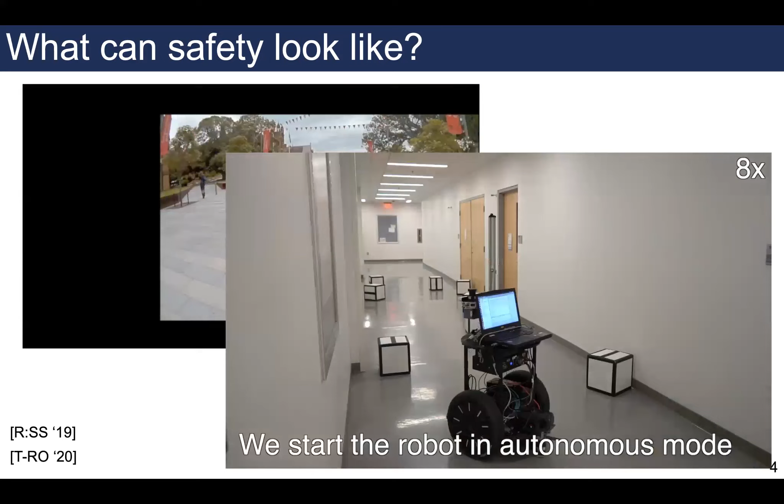And I apologize, the video froze. Well, it looks like there's a bit of lag on my end.

I don't know if you see it on your end, but whatever the case, the robot is able to drive around, avoid some boxes, and adapt to this changing environment in real time. The neat part is we can make a formal guarantee that this will happen before we actually run the robot. That makes it much more reasonable to test. Here you can see I am an obstacle, right? And I have no worries about being in front of the robot because I know it will, in this case, safely stop. Unless I hit it, it will be okay.

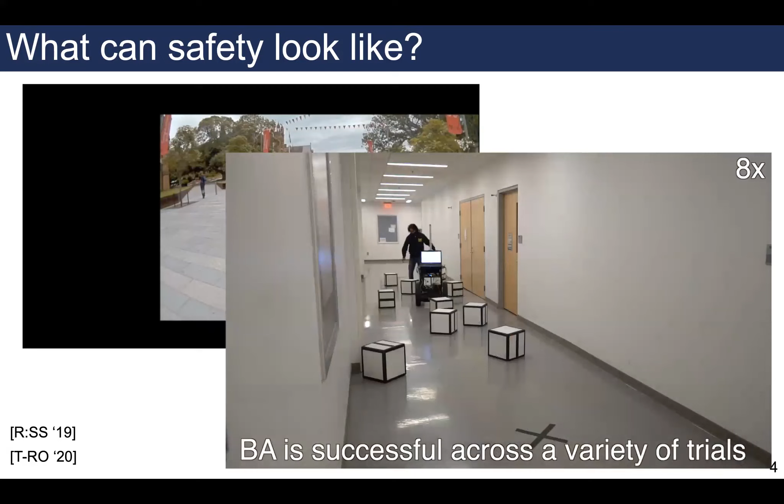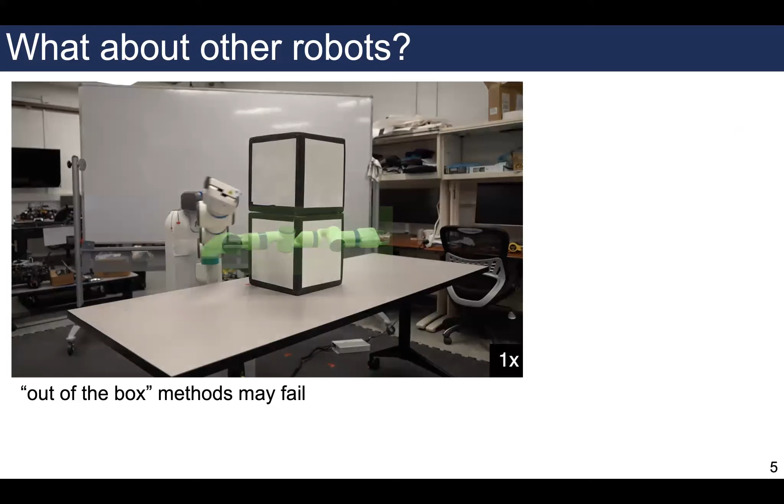This is important because this philosophy can carry over to a variety of robots. With out-of-the-box methods, and this is a bit of a contrived example, we were surprised to see that a generic solver, if you start in a singular configuration, may just converge to a really, really bad solution. In our case, we were able to solve that singular configuration problem as well, but I wanted to show this little video of a dynamic obstacle and making a safe decision. Here I accelerate the end of the video just because the robot is moving in the plane of the camera, so it's a little bit hard to see it.

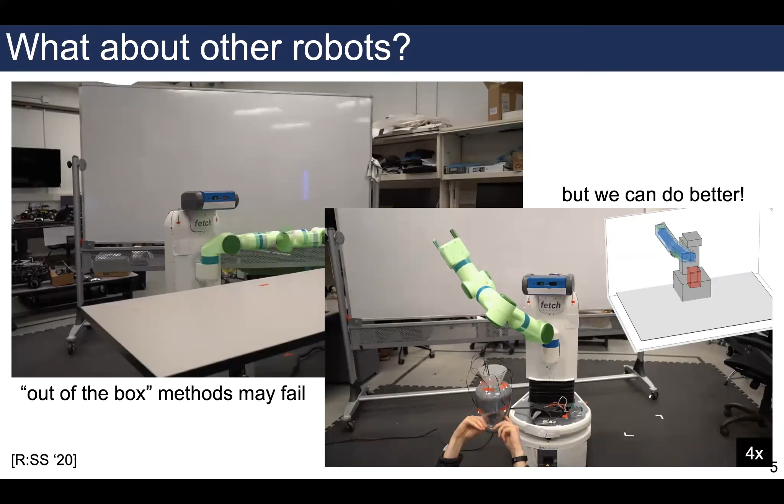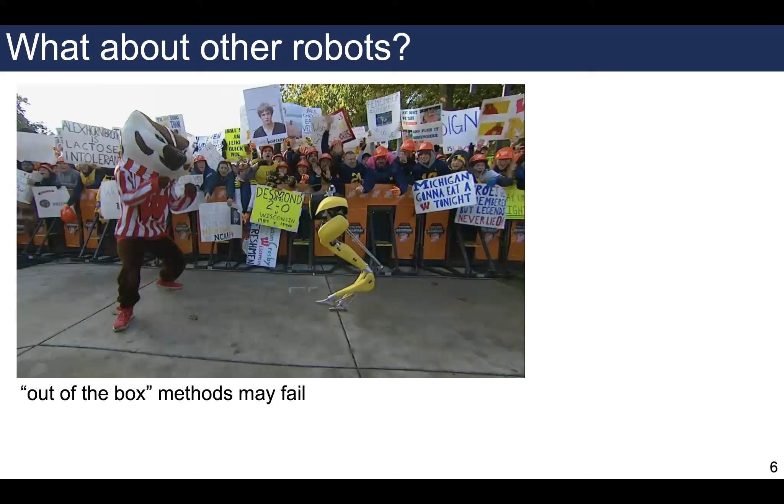But the point is, we can do better if we're very careful about pre-defining safety and getting it to work on the real robot. This also isn't always necessarily just about saving the world. Sometimes it's just embarrassing on public television when your robot falls over. I feel a little bad that this poor video of Cassie at Michigan has really gotten the runaround, but at least we won that football game.

The methods I talk about today are already being put or extended onto legged robots such as this Digit. So here Digit is autonomously deciding to move around these obstacles, and there's a guarantee that it won't fall over as well. The neat part is, by being clever, we can start to create these methods that let us put robots out in the real world. So the vision here is formalizing safety to enable wide deployment.

And obviously, you have to ask, how do you define safety? And then defining it on the whiteboard is one thing, but actually getting it to work on the robot is a whole separate problem. In this talk, I'll discuss reachability analysis methods and geometric methods that we've used in the past to answer these questions.

Okay, so first off, how do we define safety? I like to think of things in terms of the full autonomy stack. As a running example, I'll use this autonomous car. So our hardware may be the car itself. And let's suppose that we have to get to this global goal, the green star down at the end of the road. The first challenge is to sense the things around us correctly, and sensors are inherently limited.

So safety in the sensing world means correctly or conservatively detecting and predicting the motion of others. I won't focus too much on that in this talk; that's something for ongoing and future work. Instead, I'll focus on this planning and control problem. On the planning side, we usually create intermediate goals such as waypoints, and then use a simplified planning model, as I'll call it. I'll denote that with a script F. This planning model is usually a simplified description of the vehicle or robot dynamics.

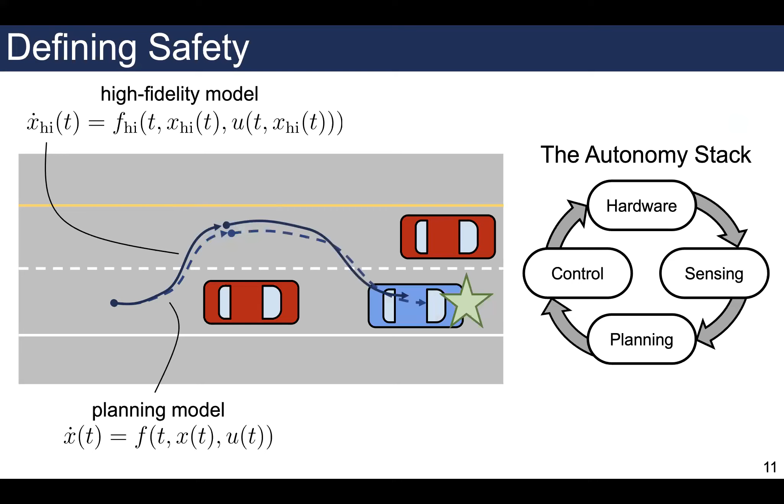And then if we were to track those plans, because it's simplified, we don't do a perfect job. So we can try and incorporate a much more accurate physics description if we were to simulate this robot, and I'll call that the high fidelity model. If we can compensate for the mismatch between these models and still execute plans that are not overly conservative, we can safely get to global goals. I'll call this mismatch tracking error.

And the idea is that safety throughout this talk will just mean collision avoidance. We can get to more sophisticated notions of safety going forward, but collision avoidance is one of the really hard ones. It's non-convex, it's non-linear, it shows up in workspace. So it's a hard problem to solve. So in this talk, I'll focus on safe, real-time, and even optimal planning and control. This is really the focus of my past work, all this planning and control stuff with the focus of getting it working on real hardware.

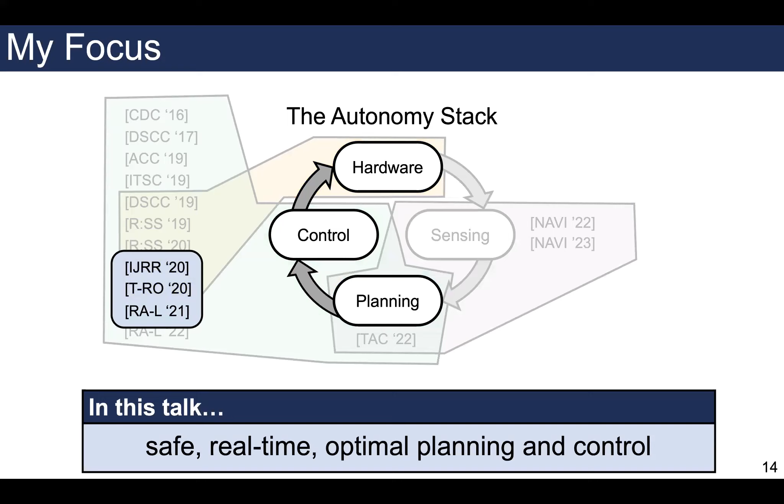And more recently, we've managed to think about sensing with some guarantees, but it turns out it's very easy to get very conservative results where you think your robot could be anywhere. So this is a key challenge for future work. Now, I can't talk about everything, so I'll focus on these three key ideas. In particular, this broad idea of reachability-based trajectory design. So I'll introduce where it came from and how we started out in this area.

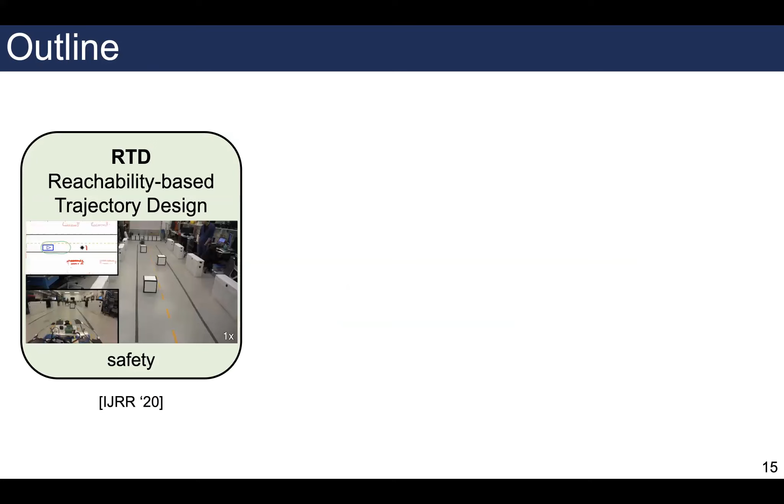And then how to exploit the safety layer. I'll exploit it in two different ways. One is on the optimization side, designing a careful optimization procedure to enable really fast and safe motion planning. And then throwing learning into the loop. So how do we use the safety layer in collaboration with an RL agent to really outperform any human-tuned way of doing this motion planning?

Okay, so feel free to interrupt during the talk with questions, and I'll go ahead and get into the first part. I'd also like to say this is all collaborative work. I tend to not like working on my own in an office somewhere. So this is the most fun part about research for me, really meeting cool, smart new people and getting to work with them.

Let's go to the safe planning problem, and we'll focus on just this left part of the autonomy stack, so planning and control really. We usually want to minimize some arbitrary cost function while picking a control and state signal subject to our dynamics and being outside of obstacles. Enforcing this constraint of being outside of obstacles is non-convex, and we have to enforce both of these constraints at infinitely many points in time. So as easy as it is to write down this problem, it's very hard to implement numerically.

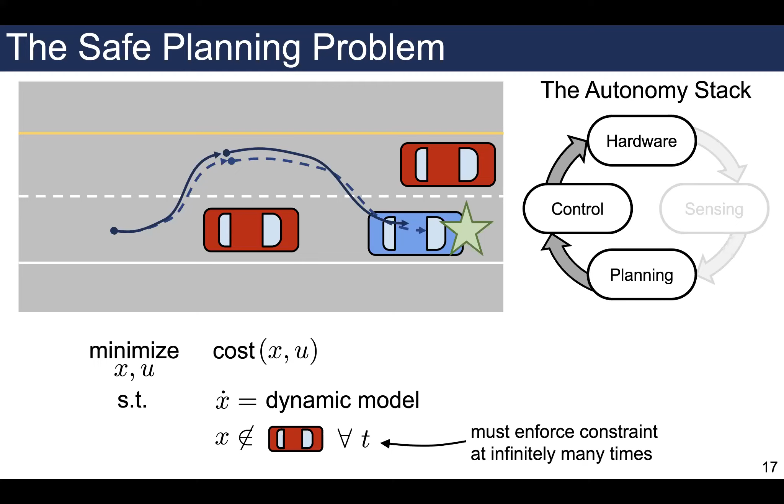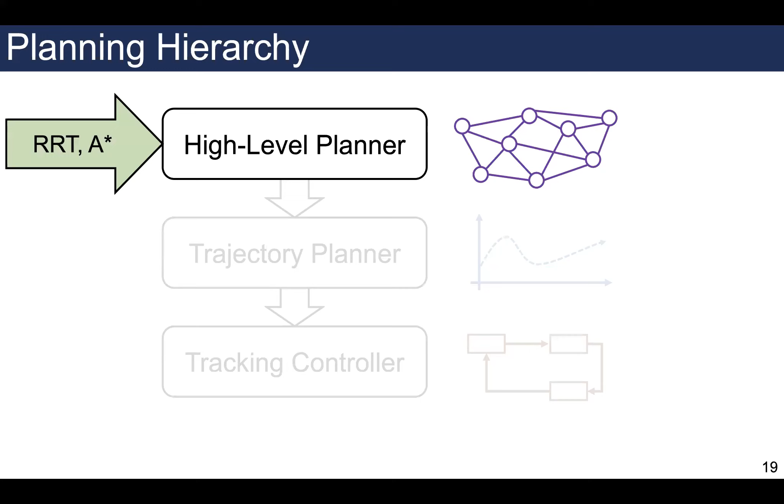Often one way to do this is to think about the planning hierarchy. So at a high level, you can create waypoints, pass these to a trajectory planner or mid-level that can plan to intermediate local goals. And then at the lowest level, your tracking controller will try and track those trajectories accurately. And as an example of the high-level planner, many of you are familiar with RRT or A*. Often in the autonomous driving case, we can think about really leveraging the physics of the vehicle.

So one example is this state lattice idea, where a point in this parameter space on the left corresponds to motion plans or path plans in the space on the right. I'll use this big K to denote parameters throughout the talk, and then big X to denote a state or workspace.

If we have an obstacle in this case at the high level plan, we can use it to eliminate plans that are unsafe. But to compensate for the uncertainty in our motion or the fact that our vehicle occupies volume, we have to dilate these obstacles by some amount. And so there's this conservativeness trade-off of how much to dilate to be safer versus making it so that we have fewer options that we can pick from.

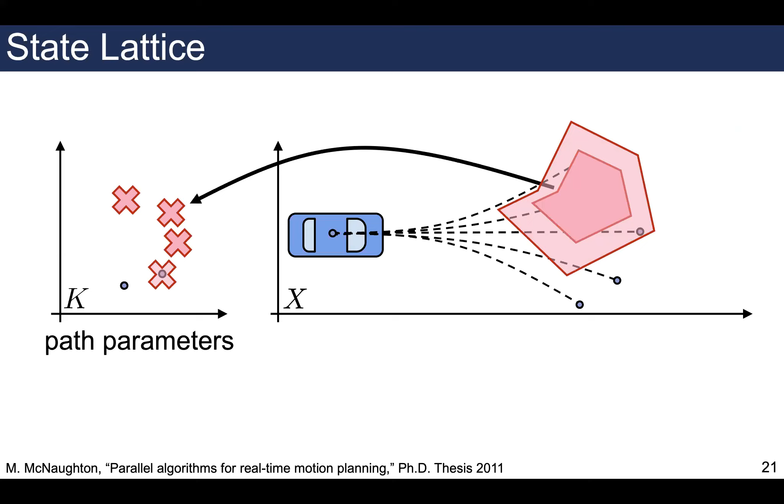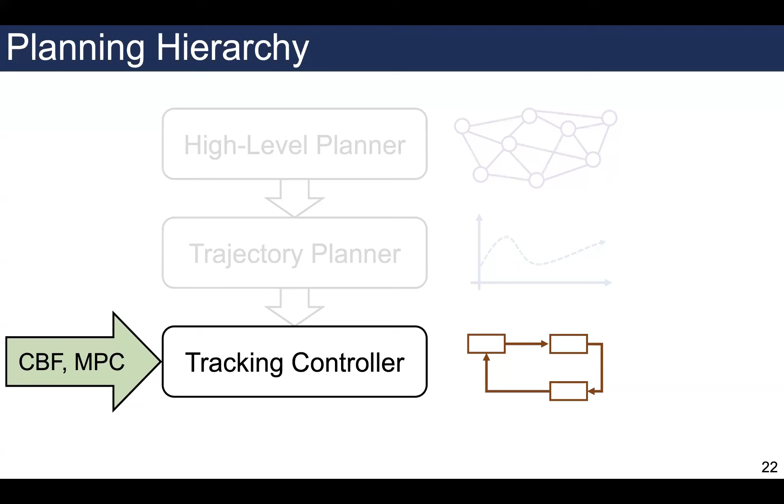We can also think about enforcing safety at the lowest level. So you may be familiar with control barrier functions or model predictive controllers, and I'll give you a cartoon overview of these again. I'll also point out, I like cartoons a lot. Please understand, anytime you see a cartoon, there's math underlying it, but I want to convey the high level idea. And then I'm happy to talk about the math, either by answering questions or offline.

So one way to think about control barrier functions, and certainly you shouldn't take this as gospel truth, but this is one way to think about it. Imagine that we have a nominal control input. So in this case, our vehicle just will go straight. But in the presence of an obstacle, we want to make sure that we stay outside of it. So I want to certify that this green set is control invariant, or I can stay within it.

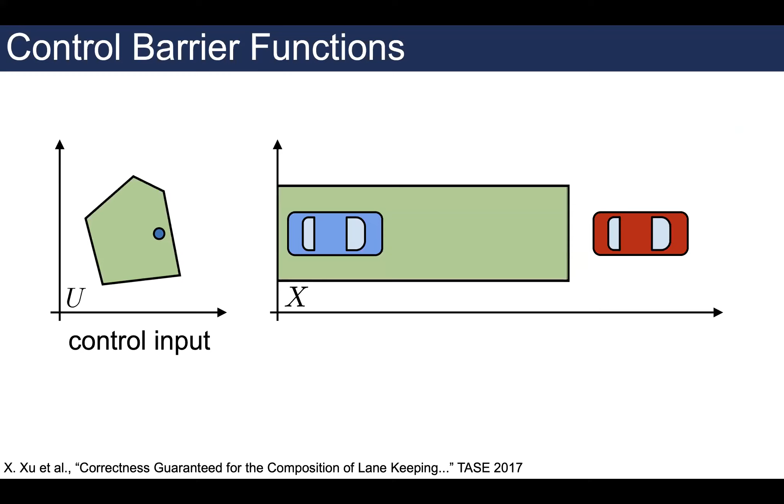If we can find a control barrier function, often this turns into a polytope of constraints on our control input that let us adjust unsafe controls to keep us within this safe set at all times. If we want that safe set to be much larger, it can often restrict our controls much more. So there's a bit of a safety versus performance trade-off, even though we can have a very strong safety guarantee.

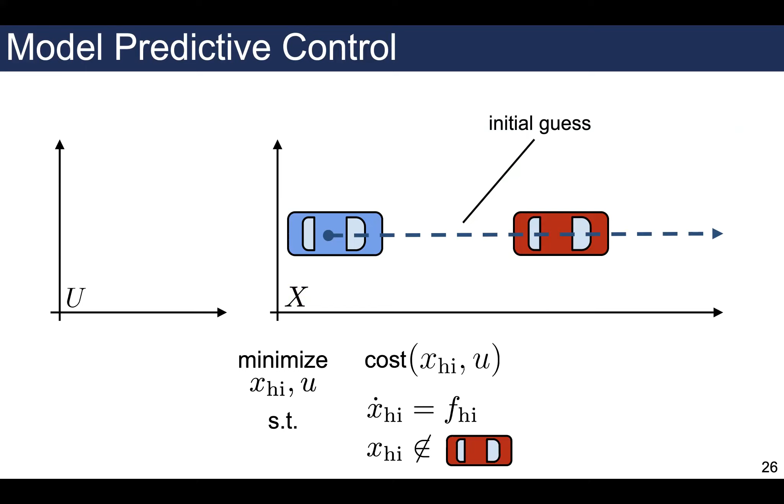One way to start to get away from this trade-off is through carefully designing MPC. So if I had an initial guess, I want to solve this exact problem we wrote down earlier, but while really considering the high fidelity dynamics, an accurate dynamical model of my robot. A solution may look like some trajectory in control space and a corresponding trajectory of the high fidelity model of the vehicle. But of course, directly solving this nonlinear, non-convex program at runtime is very, very challenging.

Instead, we can try to convexify our constraints. So create a tube of convex shapes to stay within. And typically we have to discretize in time. So we can't directly represent or put constraints on the continuous time trajectory very easily. And computing these convex tubes is its own challenge.

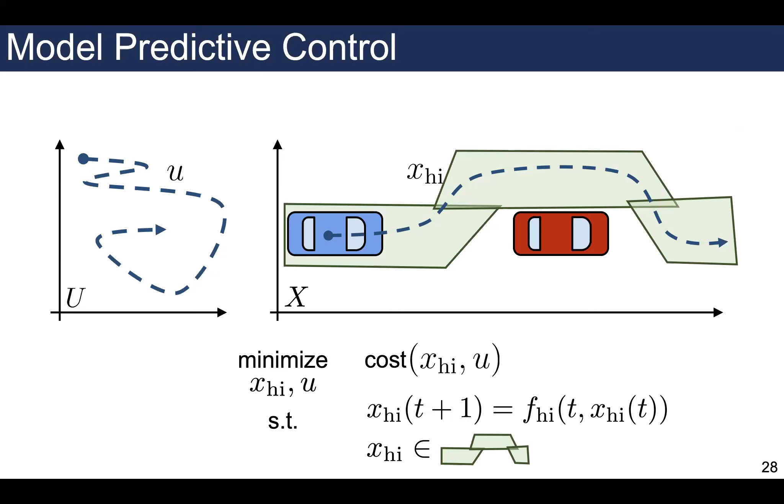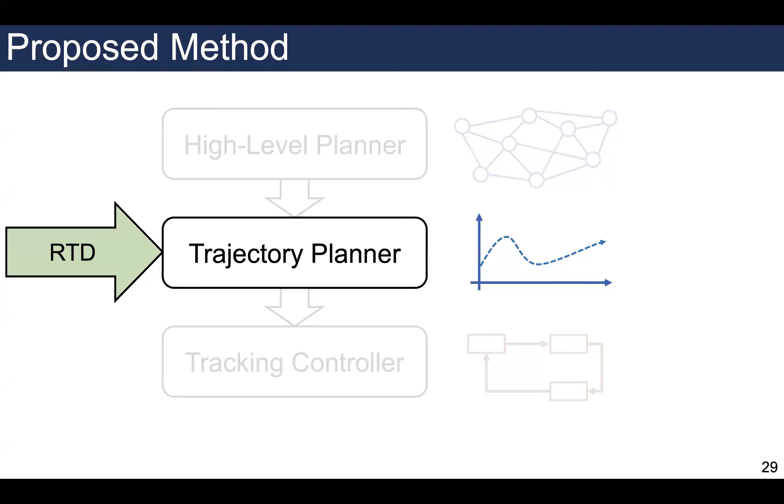I'll present RTD that thinks about safety at this middle level. And so we get costs from the high level planner, and we know something about the performance of our low level controller, and we enforce safety in the middle. In particular, we want to consider tracking error.

So we know that we're planning with some incorrect model of our robot. We want to incorporate continuous time and space collision avoidance. And we want to represent our obstacles in a way that enables really fast trajectory planning. And in particular, it's cute, but these are the contributions that we'll call RTD.

Okay, so how do we start? We begin by computing what I'll call the forward reachable set offline. And you can think of this trajectory parameter space, so similar to the state lattice, but now we're parameterizing trajectories, not paths. And each point in that space corresponds to some short motion plan of the robot. I'll give you an example of what these look like shortly.

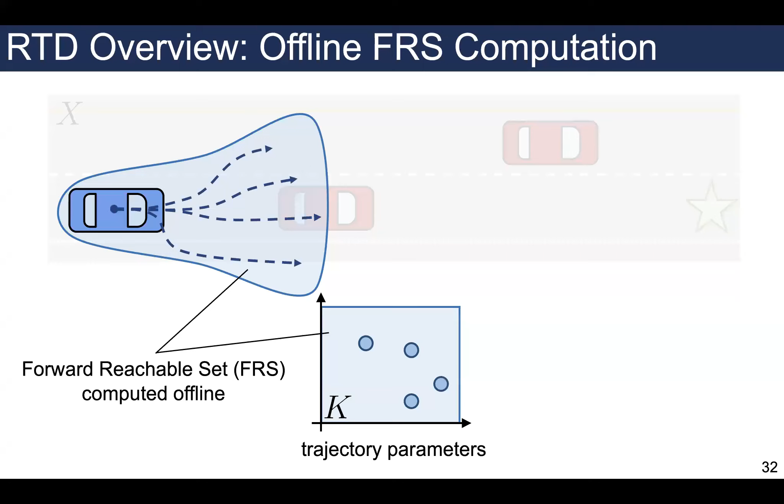If I can compute the continuum, this reachable set in state space corresponding to all possible trajectories, I can do this offline while incorporating tracking error or this model uncertainty into my computation. Given that object computed offline, we can use it online as follows. We can intersect it with unsafe sets and then project that intersection into our space of parameters.

And then given something like a cost function, so reaching a waypoint that can also be projected into the parameter space, we can basically treat the obstacles that are in workspace or state space as constraints in our planning space, and know that the corresponding tube of motion around our nominal trajectory is actually certified to be collision-free. This is despite the fact that our vehicle may not perfectly track these trajectories.

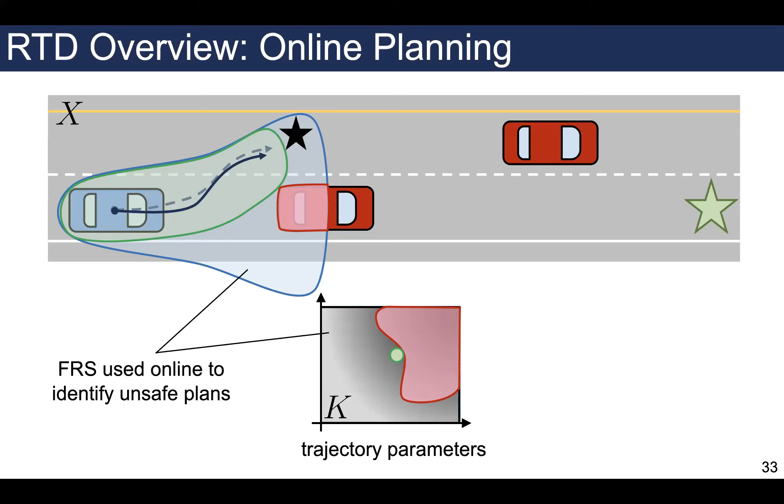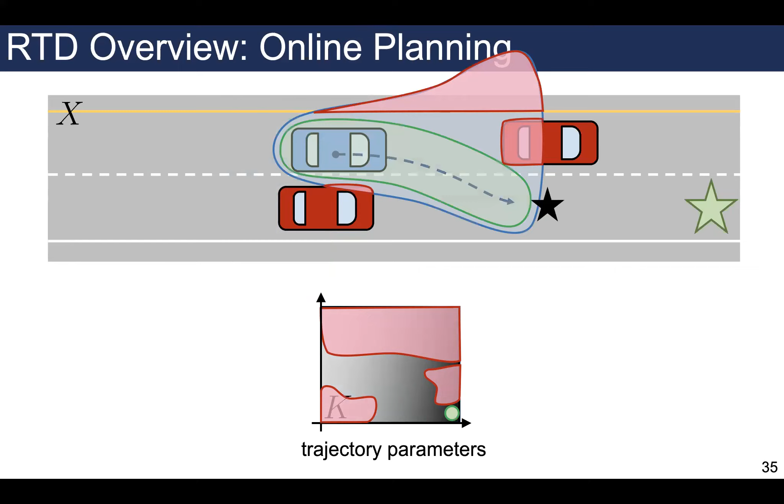Every t-plan seconds, we can rinse and repeat this procedure. So what I mean is that we're replanning over and over and over. What we'll do is we'll identify constraints, create a cost function, such as reaching a waypoint, optimize over that cost function subject to the constraints, and know that the corresponding tube is collision-free, despite uncertainty.

Shreyas, go ahead. To stop you, there was a raised hand by Chui Zhang. Yeah, go for it. I guess this was a question. Yes, can you hear me? Yep. Yes. Yeah, go ahead.

So just wonder, what's the axis of the parameter space? Like, what would be the unit, or just in general, what does the axis represent? That's on the very next slide. Good question.

A parameterization that we found really useful for vehicles is a speed and yaw rate that are profiled through time that brake after the time t plan. So if you're replanning every t plan seconds, then your speed and yaw rate, or your nominal speed and yaw rate, are changing. And you may have noticed that we're solving a nonlinear non-convex program anyways, and I complained about that, so we'll solve that later in the talk.

If I can't solve that problem fast enough at runtime, then my previous trajectory parameterization brakes to a stop. This is the notion of a fail-safe maneuver as well. So this has been explored a lot also by researchers in Munich. So the idea is, we can parameterize something that does something meaningful, like go at a certain speed and turn at a certain rate, and parameterize the braking maneuver all in one small set of numbers. And that reduces the size of the space that we're searching over, this space K on the left.

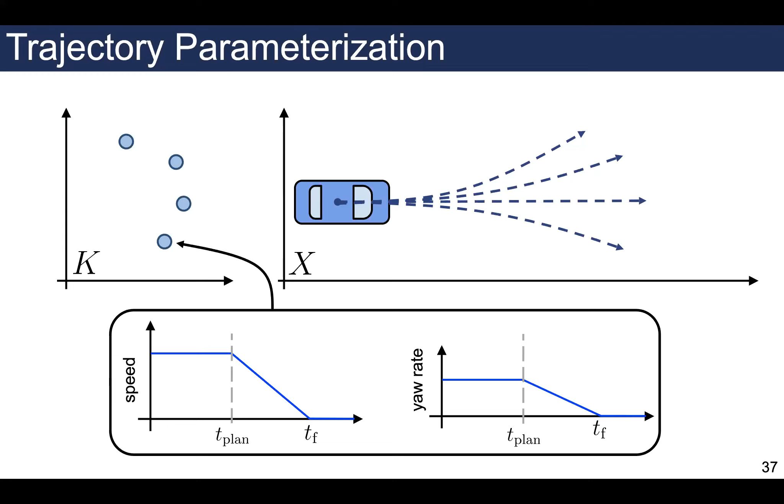So I hope that answers your question, Kong. Also nice to see you. Thank you for coming to the talk. Of course, thank you. Okay, so let's take this parameterization and run with it.

Now what we want to compute is, given our planning model, the tube around our nominal trajectories or our planned trajectories that compensate for the uncertainty in our system. And we'll do this by introducing what I'll call a tracking error model. So G here is a function that captures the tracking error, and then D is a function that sweeps, so it's just a function of time that maps to plus or minus 1,

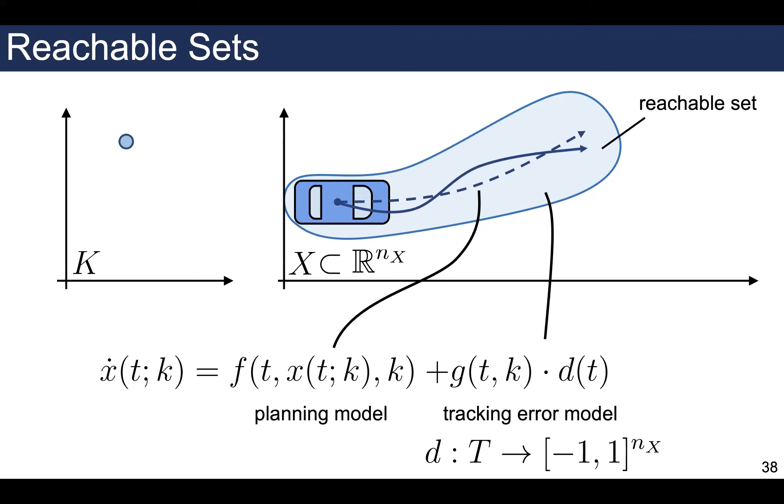so it sort of sweeps out the volume around this trajectory. And to give you a more visual understanding of what this looks like, you can imagine that G overbounds sampled tracking error trajectories through time, and then D lets us sweep out the volume.

Given a polynomial representation of the planning and tracking error models, we can then compute this forward reachable set object. In particular, one way to do this is to use a sums of squares program to find a polynomial W, such that any point in the FRS, so any point that's in the blue set, evaluates to greater than or equal to 1 on this function W.

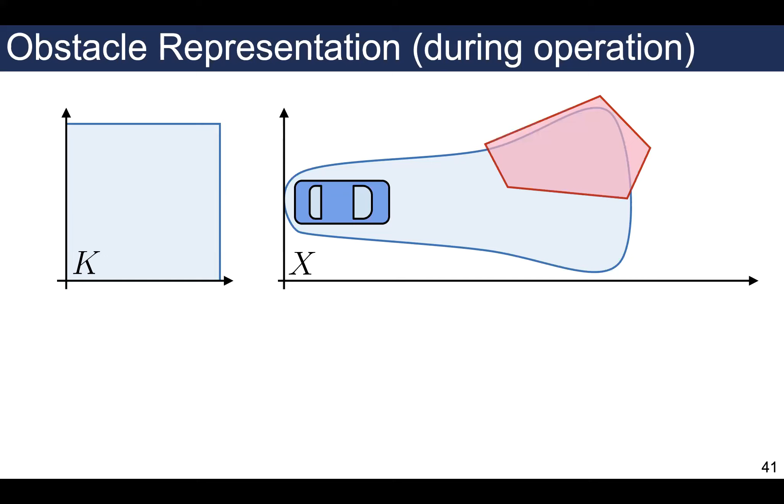Now you can imagine that this exactly will show up as a constraint for online optimization. We care about W evaluating to less than 1 for our choice of trajectory. So this is how we use the forward reachable set at runtime, at least in the vehicle case. Given an obstacle, we want to project it into the planning space on the left, so KU for unsafe.

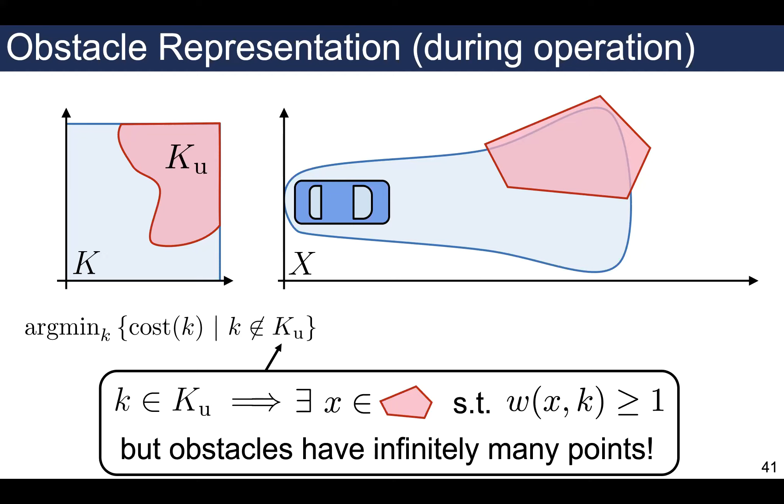The idea is to solve this problem of finding some K that is outside of the unsafe set, subject to an arbitrary cost on those parameters. And the issue is checking if a point is unsafe means checking if there exists some point in that obstacle that intersects with the unsafe set. So we have to evaluate our polynomial W on every single point of the obstacle, and this is numerically challenging.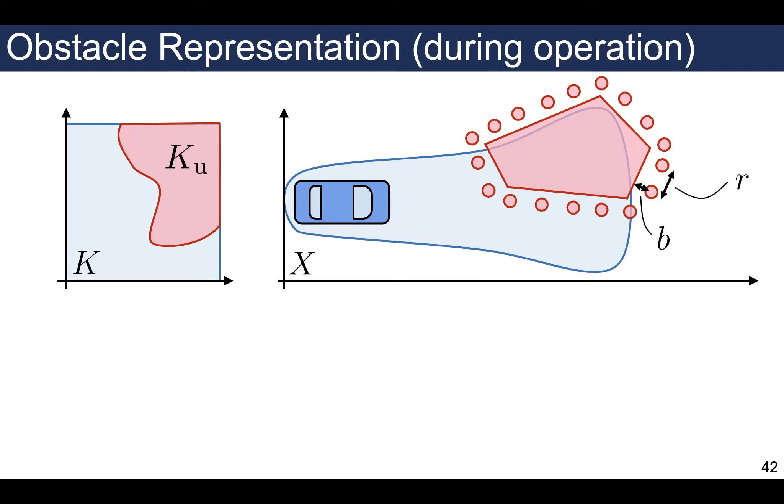Instead, what we can do is create a discretization of our obstacle, so a finite number of discrete points parameterized by a spacing R and a buffer B, with the physical intuition that our vehicle, or robot more generally, cannot squeeze between these points. The critical thing is that these values exist and they're bounded for any compact body, meaning our robot, not the obstacles. And as long as the obstacles are polytopes, then we can compute this pretty easily.

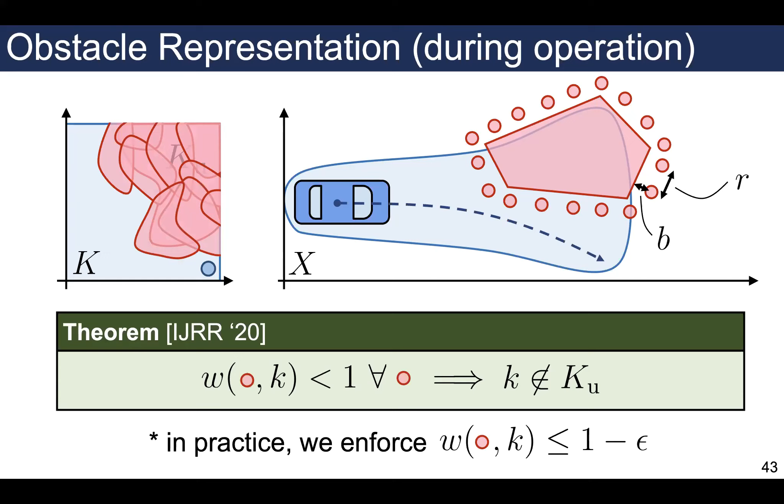The cool thing is now we can evaluate that W polynomial on a finite number of points to check whether we're safe or unsafe. And you can imagine this as taking each of the discrete points that you see on the right and mapping them to a corresponding set on the left. And that overbounds, or covers, our true unsafe set, such that if we optimize outside of it, we're good to go.

Now, we can also do this in the dynamic obstacle case. In this case, we have to discretize with some delta T, as well as the point spacing R and buffer distance B that you saw earlier. And just to hint at this idea, I'm interested in the longer term in the legal aspects of autonomous driving or widespread robotics. In this particular paper, we took the idea that safety means we're not at fault in a collision, and we turned that into collision avoidance constraints and a constraint on our braking behavior.

The cool thing is the hard constraint I've seen is almost always this non-convex obstacle avoidance constraint, but you can start to add other constraints as well for online planning that let you start to respect or obey the law, and the overall framework doesn't change very much, so it can compensate for these more general notions of safety.

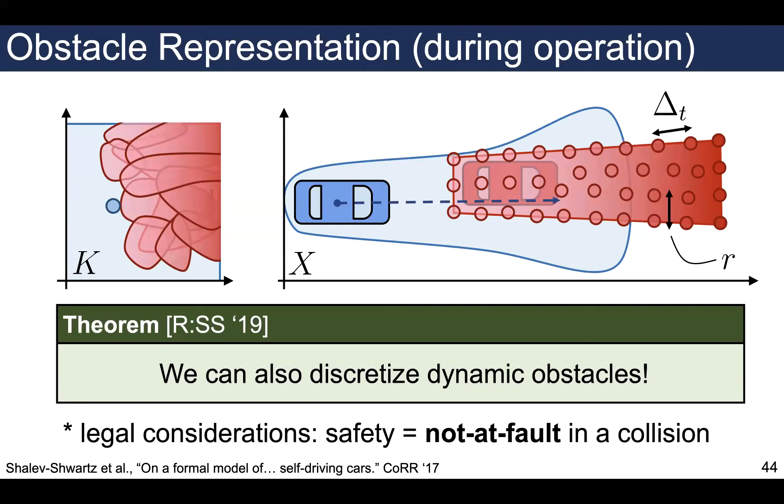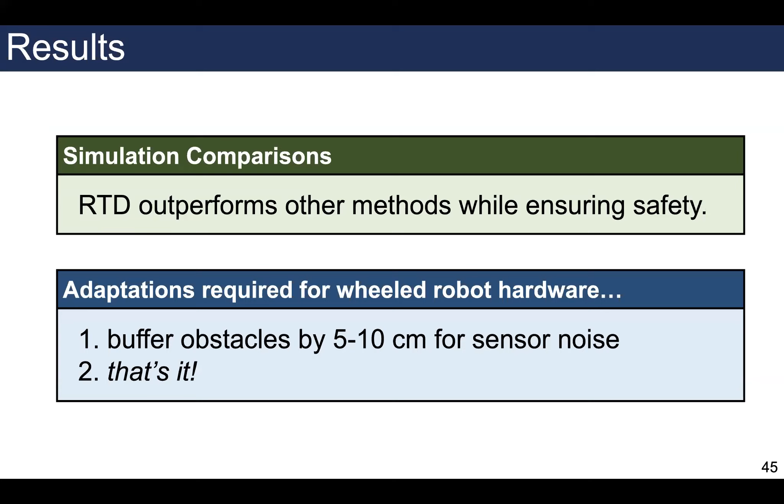Okay, so what does it actually look like? We found that it outperforms a variety of other methods while ensuring safety. I will point out a caveat here. It's very hard to set up a fair comparison. I mean, this is generally true. And I think that now we have the ARCH challenge for hybrid systems or reachability analysis, so there are efforts underway to create fair comparisons across a variety of methods. And so with that caveat in place, I'll still present these comparisons, but know that just setting up the comparison fairly is still a challenge in this field.

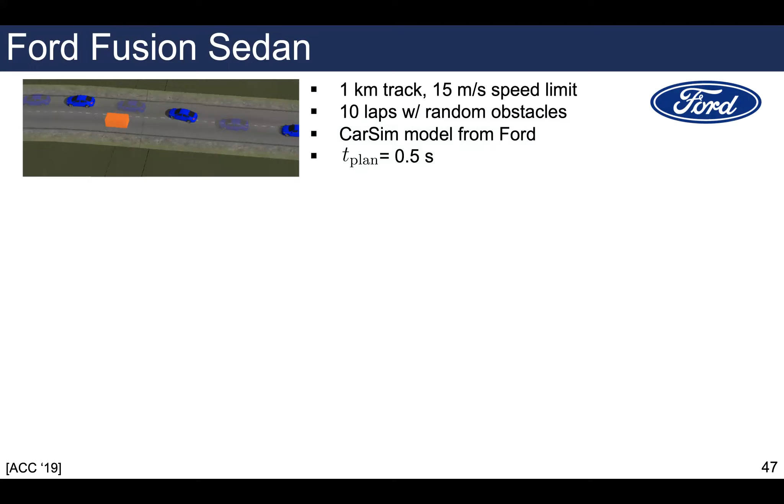And certainly you can see some conservativeness. Our reachable set bleeds out into the shoulder a little bit. So reducing that conservativeness is a big challenge going forward. But what we did is we tested it on this 1 kilometer long track to do 10 laps with random obstacles and replan every half a second. I will point out that Ford has taken this method and now they're replanning at 50 hertz, not at 2 hertz. So that was the engineering problem, not the research problem.

And to complete these 10 laps, we found that RTD was able to do it 100% of the time while planning in real time. We also compared against an RRT based on one of the DARPA challenge RRTs, and then against GPOPS-II, a model predictive control solver that had access to a very, very accurate dynamics model. I tuned this RRT and there's one crash where it couldn't brake in time. I'll point out, you can absolutely use a much more specific version of high-level planning or path planning to solve the same problem.

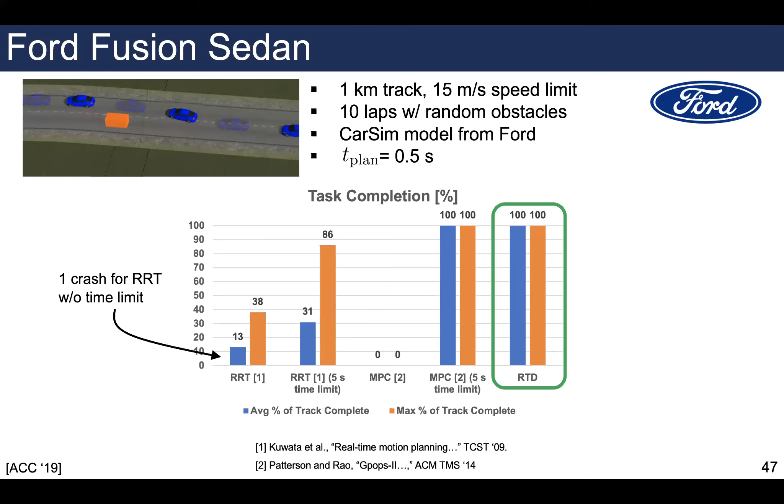But the point of this was to say RRT and MPC in this comparison had a safety versus performance trade-off. And we were starting to see a decoupling of that. We were able to get performance while also getting safety and planning in real time. And this is the beginning of this work that made me feel really excited that we're onto a good way to not just write down theoretically what safety means, but also to put it on the actual computer, on the hardware.

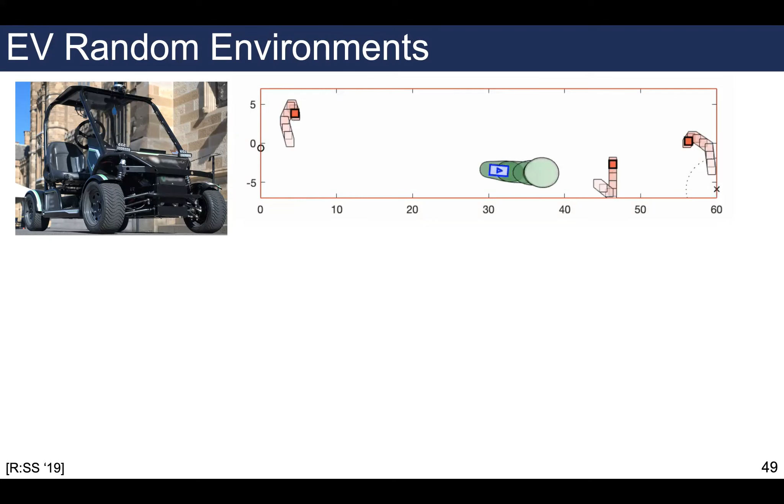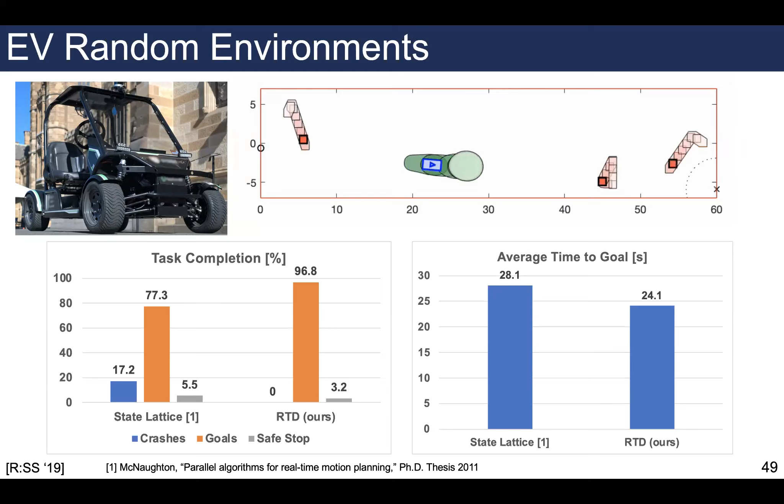What we found is that it took us less time to reach the goal in these random environments. So by driving a little bit more carefully, but by making that safety guarantee, we were able to improve the rate of a mobile robot moving through a dynamic world. We also tried some more structured environments. So here's unprotected left turns where the cars and pedestrians are simulated. They don't care about each other. They're just doing what they're going to do, and we assume some prediction of them.

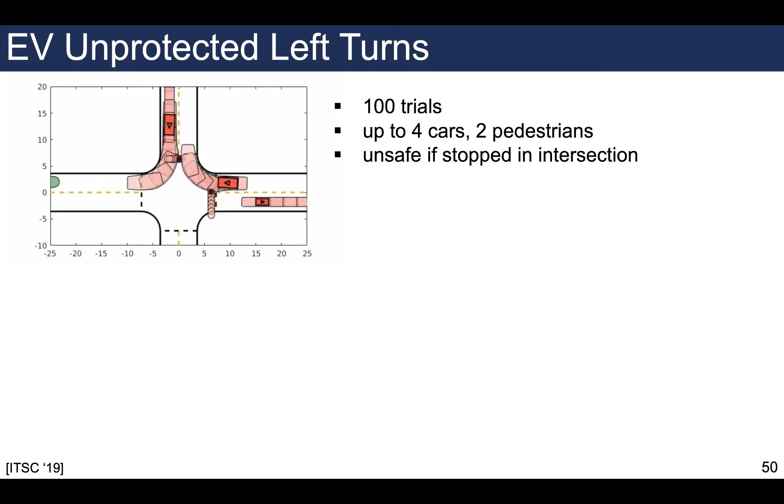But the cool idea is that we can validate this entire left turn maneuver before executing it. In this case, we saw that just running a collision checker and then tracking this trajectory that was predefined still resulted in some crashes. And certainly the more we tuned it to avoid crashes, the less it was able to complete the task. Whereas with our method, we were able to just make the left turn in 99 out of 100 times, and one time we just never entered the intersection.

Surprisingly, as you saw earlier, we're more patient. So the idea is you can wait until your whole maneuver is validated, and you're able to actually get all the way to the goal. Again, I'll point out that we're still pretty conservative. Our reachable set is a lot bigger than what you would really think the car is going to execute. So on the numerical side, there's a lot of work to be done in reducing that conservativeness.

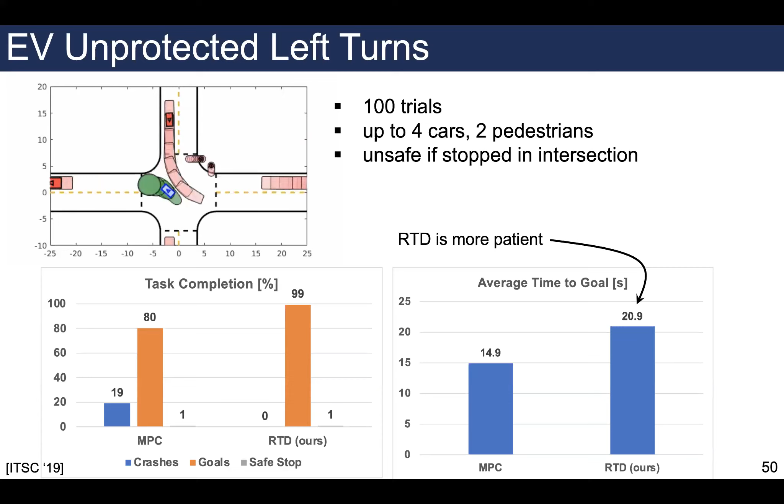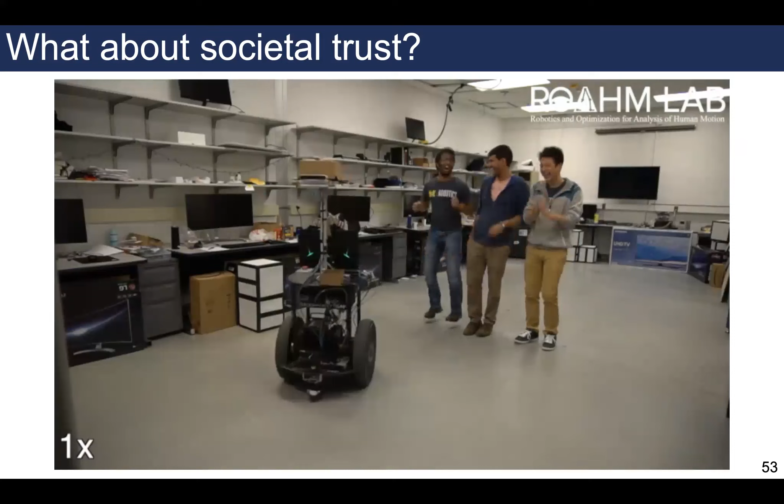But we did this on a whole bunch of different wheeled robots in a bunch of different settings. And we found that across the board, we're able to do this. And we decided to really put some skin in the game here. So in this case, we asked the Segway to come towards the camera, and we faced away from it. Honestly, this is the first take. We didn't know what was going to happen. But the robot autonomously drove around us, and it's a 200-pound robot moving at over 1 meter per second, so it would hurt.

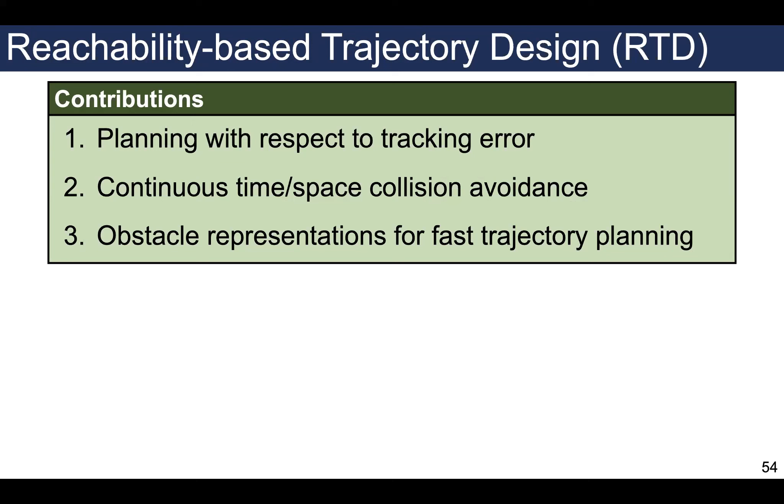But the nice part, the takeaway, is we're able to start thinking about societal trust or putting robots out around people because we have a safety guarantee. Of course, we haven't solved all the problems. Reachability analysis is hard. It takes a lot of compute. And in this case, we're assuming some open loop interaction. So the idea is that the predictions of other agents moving around don't actually change when we create our short trajectory plans. Sometimes that's actually a valid assumption, like in traffic, often people don't interact with each other.

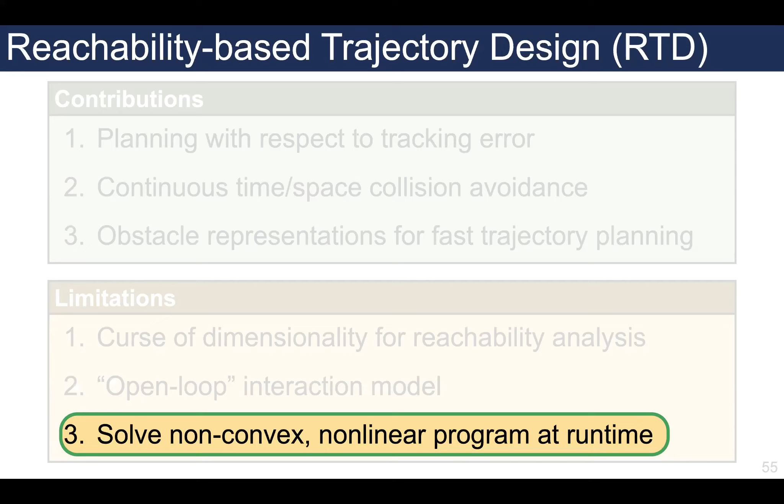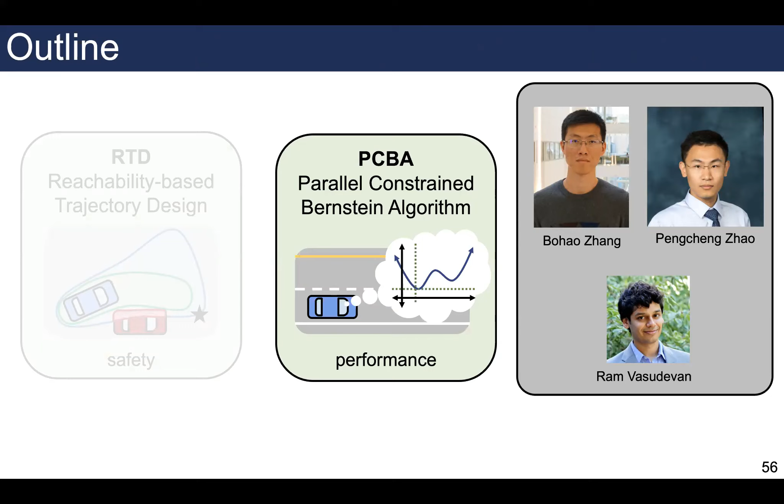But then the last thing that we had to solve is this non-convex nonlinear program at runtime. And that's really, really challenging, right? So I'll address a method that we introduced that can provide optimality and runtime guarantees on this challenging optimization. So this brings me to the second part of the talk, the parallel constrained Bernstein algorithm. And this is in collaboration with some lab mates at Michigan and Ram Vasudevan, who's a professor at Michigan. So our goal was to leverage the safety layer to get performance out of the system. In particular, at runtime, we're solving this program. We have all of these constraints.

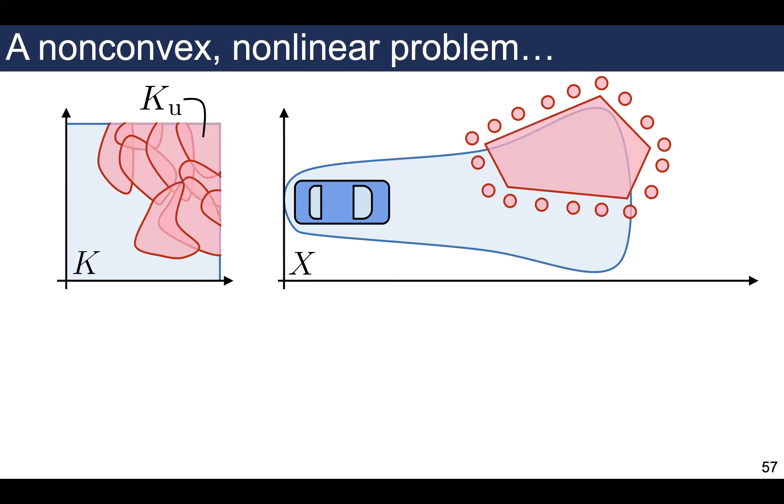We want to minimize some arbitrary cost on our trajectory parameters subject to this W polynomial being less than 1 on all of our discrete points. This is a pretty low dimensional problem. In the example I showed earlier, K is actually only a 2-dimensional space, but we have hundreds of constraints.

We're discretizing usually an occupancy grid or polytopic representation of the world around us that turns into hundreds of discrete points. If our cost is a polynomial, so if we take a Taylor expansion of our dynamics and then minimize the squared distance to some waypoint, that's an example of a polynomial cost, and now we have polynomial constraints. We can start to exploit the structure of this problem.

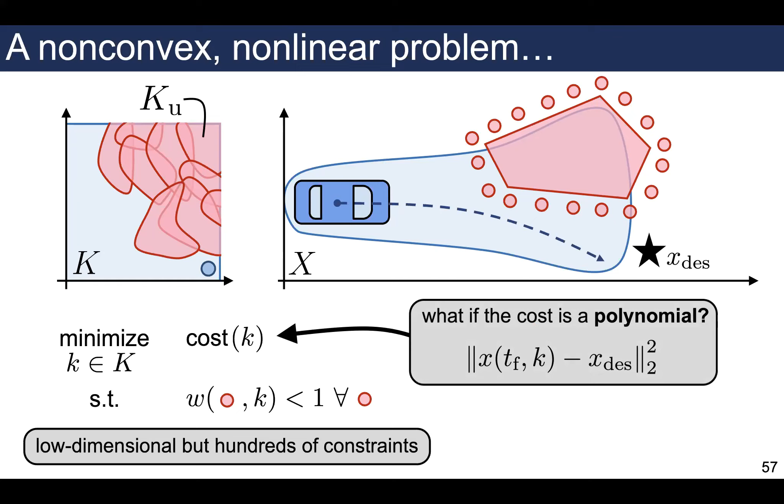And to put this in context, we propose this parallel constrained Bernstein algorithm that has to do 3 things. It has to be fast enough for real time. It has to get us an optimal solution, and it can't use very much memory. What we were using before in RTD was actually just MATLAB's fmincon solver, which is fast and uses almost no memory, but it never has a guarantee of optimality because it's a gradient descent-based solver.

On the other hand, there's this bounded sums of squares or BSOS solution. This is directly optimizing over polynomials, and you can get the optimal solution, the guarantee, but it takes a long time and it tends to use a lot of memory for large numbers of constraints. And then finally, a branch and bound method, the dividing rectangles method, which in the unconstrained case does give you optimality guarantees and doesn't use any memory. We found that it was pretty fast, but not the fastest. Instead, we proposed this parallel constrained Bernstein algorithm, which is a different type of branch and bound to solve this issue.

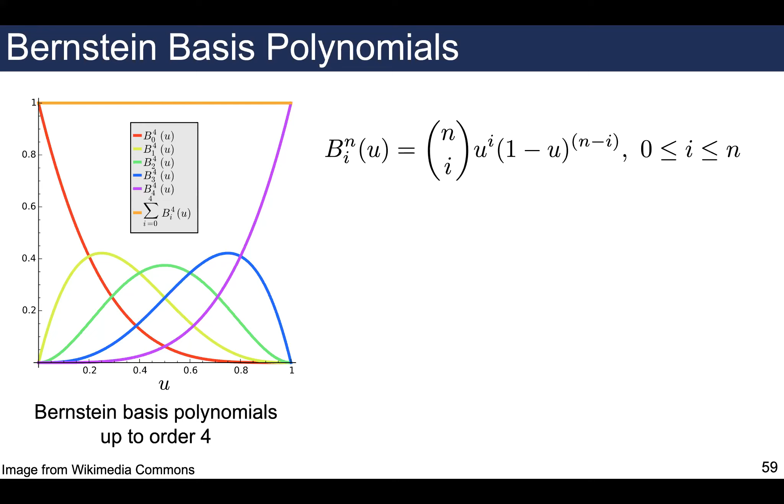So to introduce this, I'll point out what Bernstein basis polynomials are. Here you see the Bernstein basis polynomials in 1 dimension up to order 4. The idea is that you can explicitly parameterize any polynomial in this basis. Writing all the math out doesn't matter so much as this idea that any polynomial expressed in this basis has its value over an interval bounded by the coefficients in this representation. This hints at how you might use this for optimization, but I'll illustrate it.

So imagine that our polynomial cost is represented in the Bernstein basis, and the upper and lower bounds are represented by this blue box. We can compute these coefficients with a linear transformation, and as we subdivide our interval, we get tighter and tighter bounds on the value of, in this case, our cost polynomial. So our upper bound and lower bound have shrunk a little bit, and then we can maintain an optimal value estimate as the least upper bound, and an optimizer estimate as the center of whichever interval contains that least upper bound.

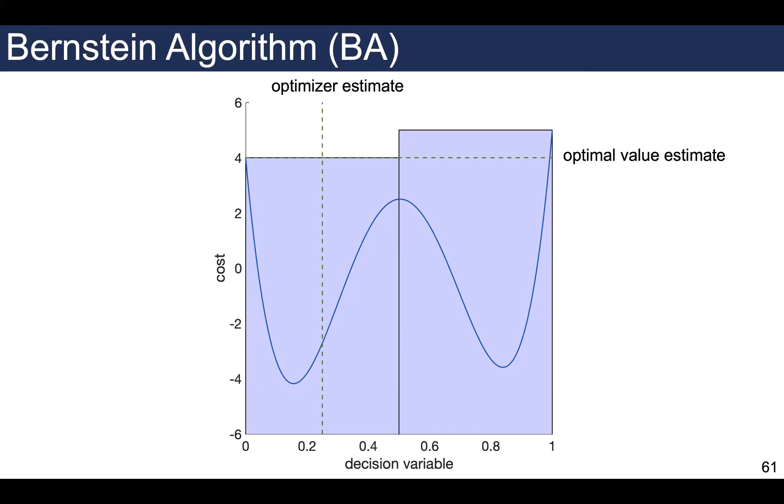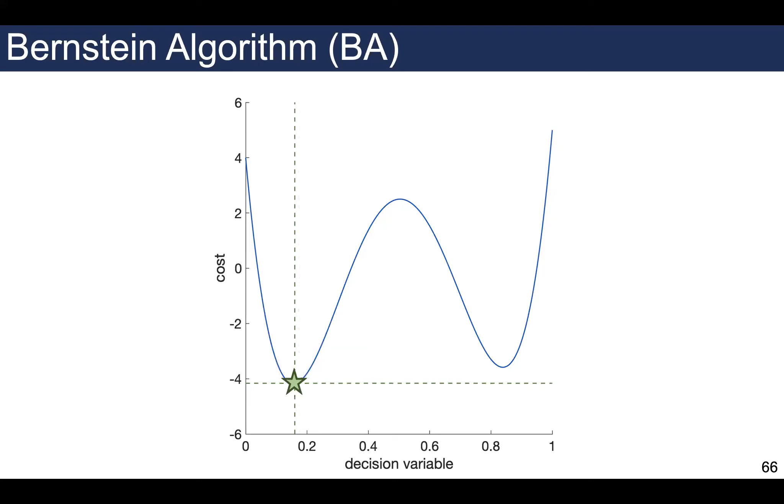So this is the standard branch and bound approach. The key idea is we're using this Bernstein representation. By branching and bounding, you can start to eliminate areas that could never contain your optimal solution. And then eventually you're guaranteed to converge on the globally optimal solution, in this case shown without any constraints. The nice part is that we can parallelize this while incorporating constraints, and then prove the convergence rate and show that it actually helps us on a real robot.

In terms of the convergence rate, as you increase the tolerance required of getting to optimality and constraint satisfaction, the growth is logarithmic, which is what you'd expect from a branch and bound algorithm. But the takeaway here is really that you can plan optimally in real time. So don't worry too much about the math. Just think about this as knowing how many iterations you have to run on your computer to get to your solution before you even put it out into the world.

And of course, as I said earlier, we're not going to just directly put it on a robot. We compared this against the other algorithms that I mentioned earlier on a variety of benchmark problems. Here's a two-dimensional problem that's notoriously non-convex and has hard optima to find. On problems such as this, we often found we had lower optimality error than other methods for the same tolerance. And then we were able to solve nearly as fast as fmincon by parallelizing on a GPU.

In other words, we can outperform these other solvers, so it validates the idea that we should put it on a robot. And that's exactly what we did. All right, so in this video, you'll see, one sec. All right. This is in direct comparison to fmincon.

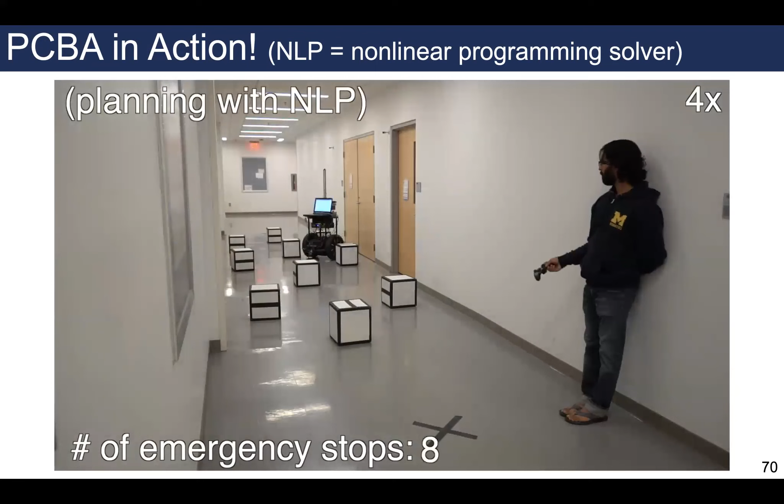So here I set up a deliberately challenging scenario. The robot's cost function is just to get to the end of the hallway. And then I counted how many times it stopped safely when planning with NLP or nonlinear programming solver. So this is fmincon. And then it spends 43 seconds.

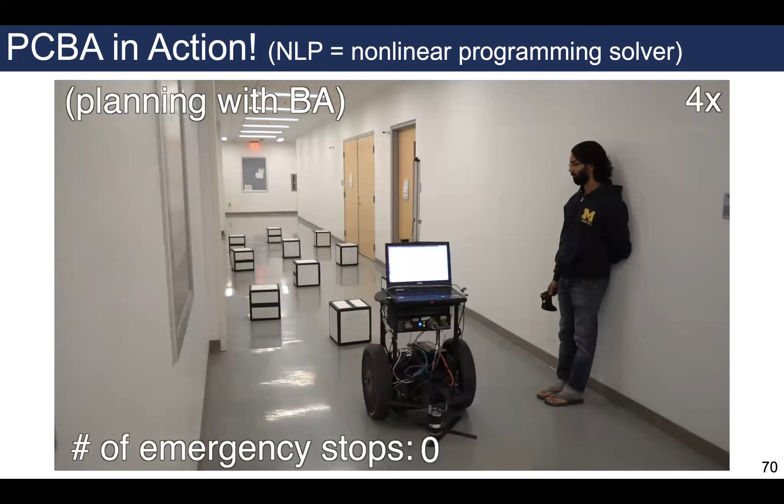The same trial with the Bernstein algorithm, we count the number of emergency stops, and it's not perfect. This is a hard scenario. And it didn't know where the obstacles would be, but we're able to significantly reduce the number of stops and the total time spent on getting to the global goal.

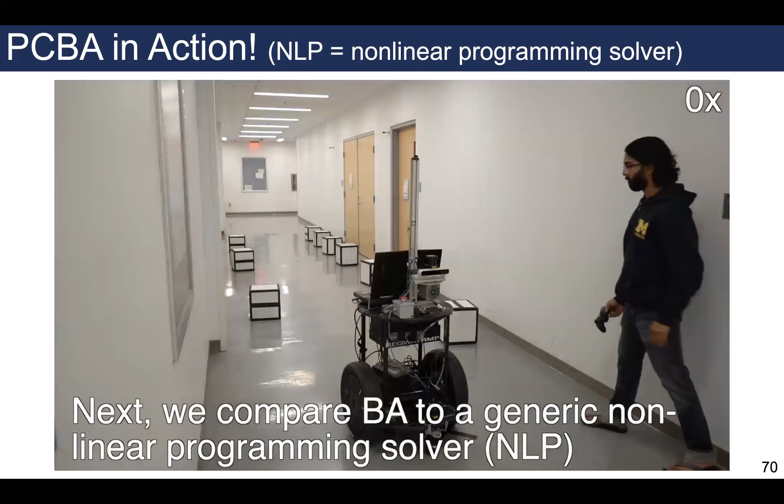So to really push this, I created a scenario that I thought that the robot would never be able to solve, and then tried out fmincon. So it immediately starts converging to local optima and making bad decisions, and then immediately gets stuck. And that's what you see here is the robot, when it gets stuck, I programmed it to just wiggle in place and see if it can start to get out.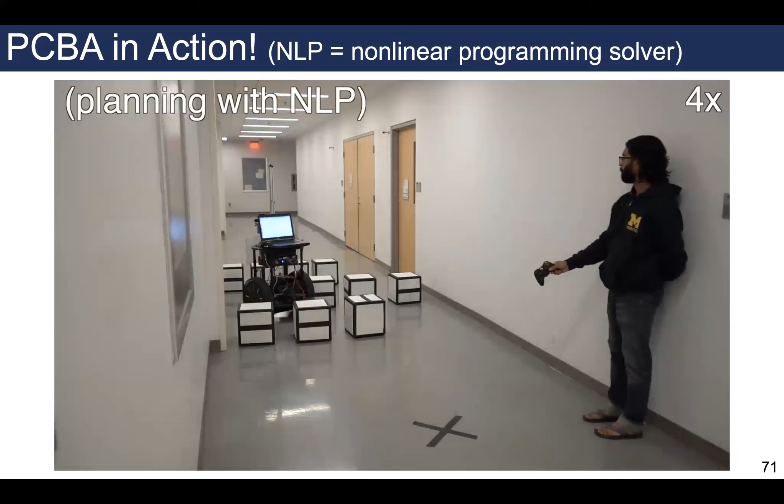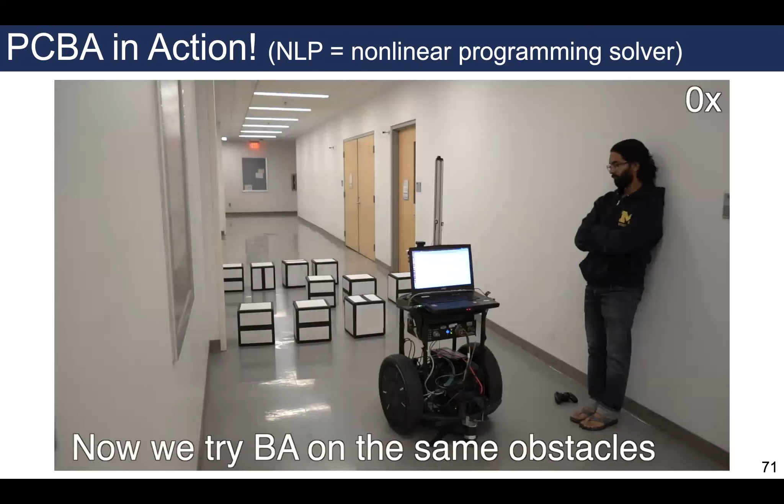So then I manually drive it to somewhere that I think it can get out. It gets stuck again. And then I have to manually drive it again to get it to go through this very tight corridor. The corridor is just wider than the robot. And then arrogantly on the first take with the parallel constrained Bernstein implementation, it just worked. With the exact same cost function, exact same constraints, it was able to make much better decisions with this optimality proof.

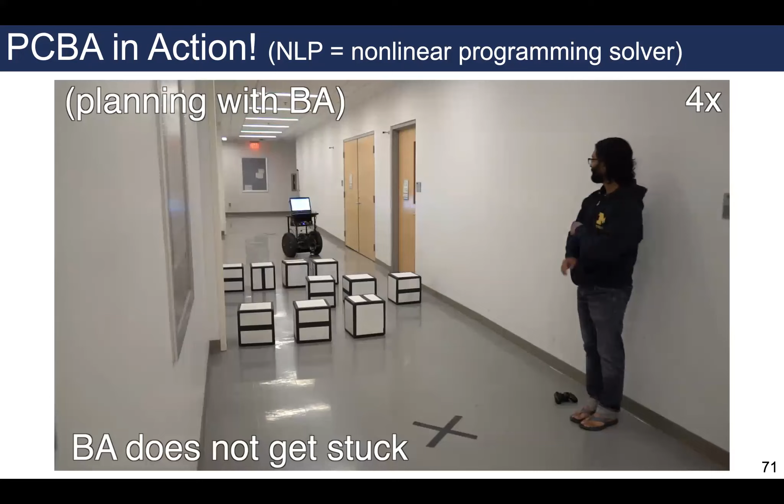So the idea is we can do safe, real-time, and even optimal motion planning, so we're proposing this fast solver for low dimensional and highly constrained polynomial optimization problems. This is a generally useful tool, but I'm glad to see it worked on the robot. Again, we haven't solved all the problems in the world. This requires a GPU, though I don't think we ever used more than 11 megabytes of GPU memory.

And then the thing I want to talk about next is hand tuning this high-level planner and solver. So I mentioned at the beginning of the talk, we have this notion of a high-level planner like RRT or A-star that can tell us waypoints that the robot should reach. That still had to be hand-tuned. We just had an optimality guarantee in the intermediate mid-level solver. And this is, I think, the exciting part where we can start to bring reinforcement learning into the fold.

So this method I'll propose is called Reachability-based Trajectory Safeguard. We did it originally at Michigan with Simon Shao, Chao Chen, and Ram, and then Amr, Mahmoud, and Marco and I continued this idea along with Kala Johansson and Grace Gao at Stanford. So this is an ongoing idea of creating a safety layer for reinforcement learning, but I'll present just the preliminary work in this space.

So the goal is to learn to leverage these safe representations that we set up in the first part of the talk. In particular, if I hand tune A-star or something, it may do a bad job of generating waypoints, but that can lead my lower level parts of the autonomy stack to converge to poor solutions. And in this case, my trajectory planner, if I use something like fmincon, may converge to an infeasible solution.

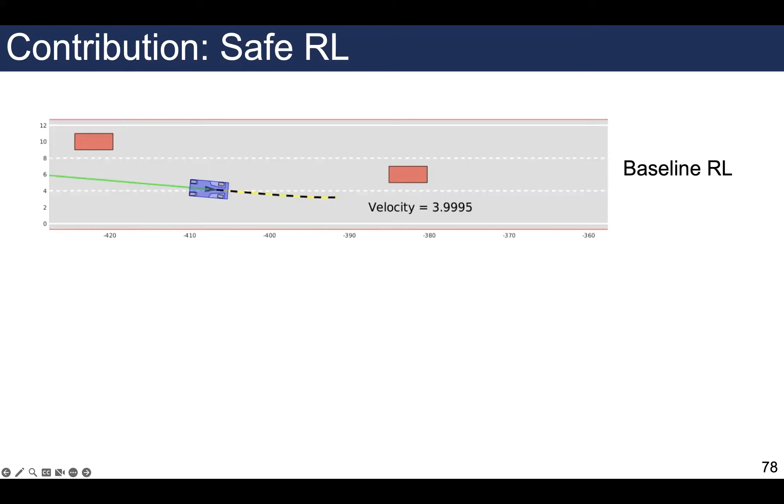Also, I see a question in the chat. One sec. Yeah, no, it's okay, that's a good question, comment. It's a reflection, I think. Maybe you don't need the Bernstein algorithm for life decisions, only for local short time horizon decisions.

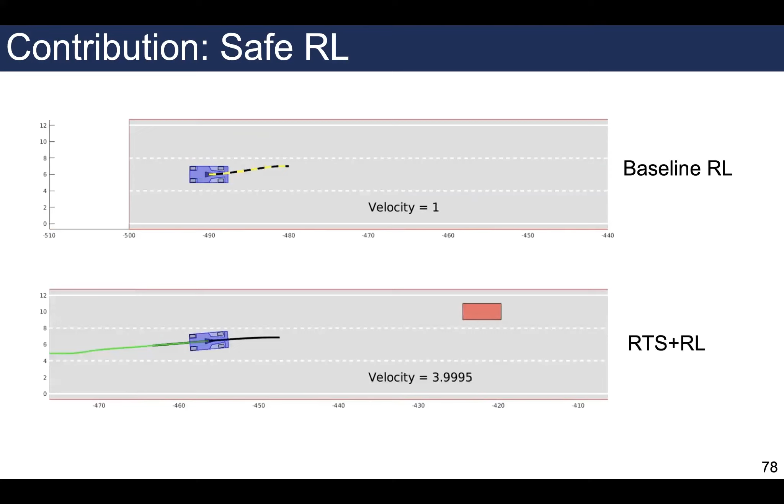RL is better for long time horizon decisions, and that's what we see here. So this is during training, right? So the vehicle is not really making good decisions, but what we're able to do is we're able to adjust. So here it makes an unsafe decision and then has to brake to a stop safely. And so the dashed yellow line that you see is the RL agent output, which may be unsafe. And then the solid black line is the corrected or adjusted safe trajectory plan.

And while training through this method, we noticed that basically we're able to outperform my personal hand-tuned RTD solver. So that was a little embarrassing for me, I guess. But we would create some pretty hard highway driving scenarios, and I thought we were doing great. We solved 90% of them with RTD, but RTS, the safety layer with the reinforcement learning, was able to get to 100% of the goal. So it was able to fully exploit the safety layer while still accomplishing its task.

This also accelerated planning time. So you can think of this as taking a really good guess at solving that nonlinear, non-convex program. And so only a couple of gradient descent steps get you to a really good solution. And then, of course, we wanted to validate that this is safe. So obviously the safety layer is the same as RTD. It just prevents the vehicle from crashing.

So this is my very bold claim. In more recent years, I don't necessarily agree with this anymore, but at the time it felt like tuning the RL agent was actually easier because we didn't have to worry about the safety versus performance trade-off. And so in some sense it is easier, but you're still dealing with a hyperparameter search. So there are challenges.

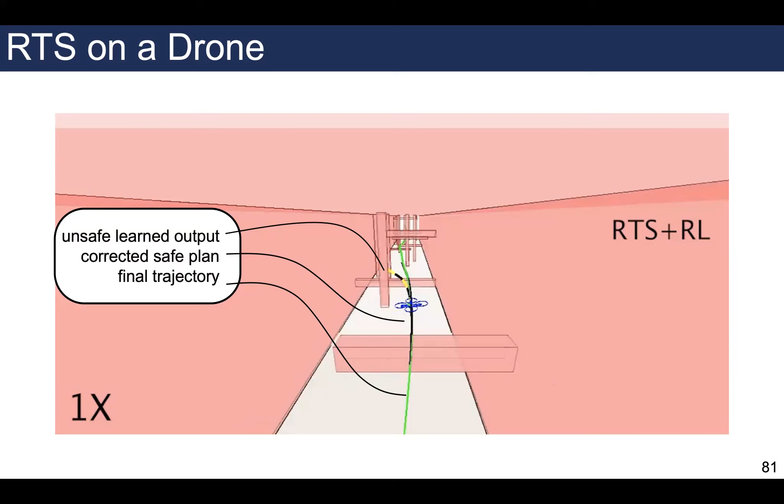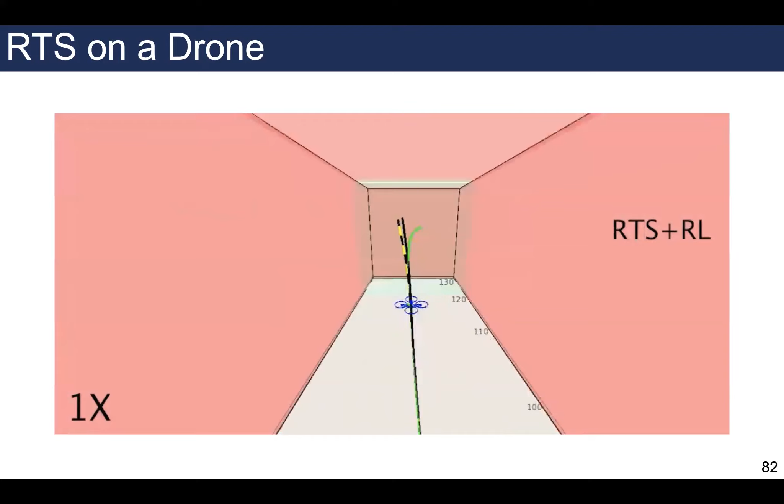Now, the fun thing is that this worked across a variety of robots. So here again, you'll see the yellow dashed line is the output of the RL agent, its plan. We correct it to a safe plan. And then here, the final trajectory is actually overlaid due to a plotting confusion, but know that the trajectory itself is actually being generated at runtime by the drone. We deliberately reduced the density of obstacles to make it possible to see what's going on in one of these example scenarios, but the actual scenarios were much, much more dense in this little flight tunnel.

Okay, so that's what we've talked about: this idea of incorporating safety through reachability and then leveraging the safety layer in two different ways. PCBA lets us exploit it for performance, in particular optimality and real-time planning guarantees. And then RTS lets us exploit it for long-horizon planning, improving task completion over the long horizon by knowing that we're implementing safety in a short time horizon.

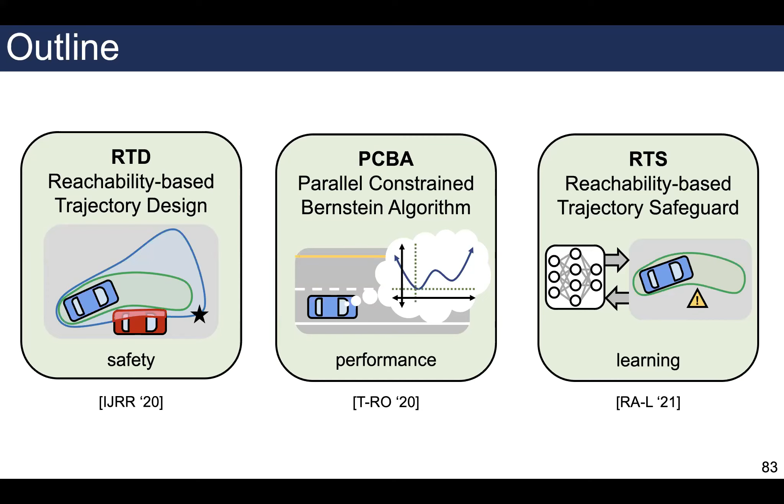Where do we go next? Like I said earlier, I want to formalize safety to enable wide deployment. And this is what I'm planning on working on. So I just started as a professor at Georgia Tech. Actually, I'm very glad that some of the students that are joining me in the fall are here attending this talk. So thank you for making the time. This is what we're going to work on.

So first of all, I think bringing learning into this motion planning problem is really interesting. And then robustifying perception, I've worked on it a little bit, and I've just found that it's really hard. There's no nice answers, which you would expect. But the reason to work on these two things is actually to unite them in this notion of co-designing the various components of the stack, even the hardware, to make a robot have its own notion of safety. And I'll give you a flavor for what each of these directions looks like.

So in learning to plan safe motion, one of the things that's really challenging is computing these reachable sets for really high dimensional system models. So if I have a very complex system, like a manipulator arm subject to uncertain dynamics, it's hard to compute reachable sets. And even if I can compute that offline, it's not correct when my model changes at runtime. My road friction may change, or something about my environment can change.

And so here's an example that we saw. Here, my lab mates bravely volunteered to be obstacles for this little quadrotor that's running RTD. And I deliberately asked them to walk slowly so that it would force an interaction. So we see the drone do this little spiral maneuver to wait, and then eventually it reaches the goal. But in fact, I didn't know that there was an air conditioning vent open before we ran this experiment, and it pushes the drone almost out of its reachable set and into the obstacle.

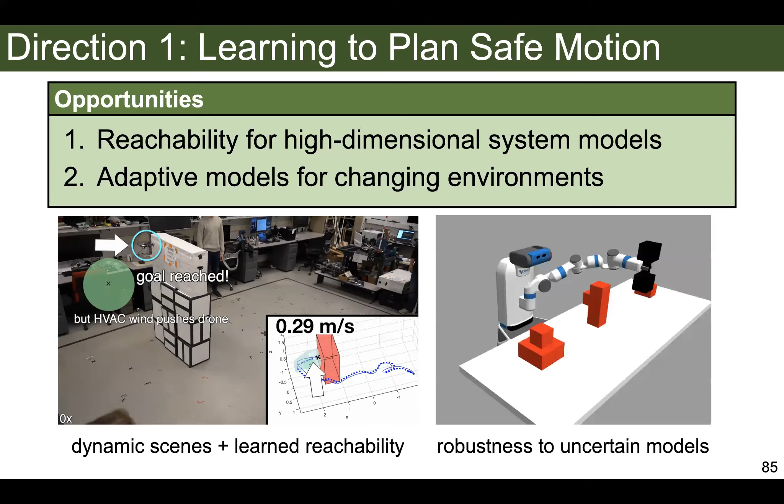Obviously, this is not good, and it's fundamentally down to modeling error. Our models were all fixed offline, including our notion of tracking error computation, but the dynamics changed at runtime, so our reachable sets were no longer valid. I'd be very, very excited, and we've started working on this, about adapting our reachable sets at runtime based on a changing model. And a paper that we've just recently put on arXiv also considers robustness to model uncertainty in a different way.

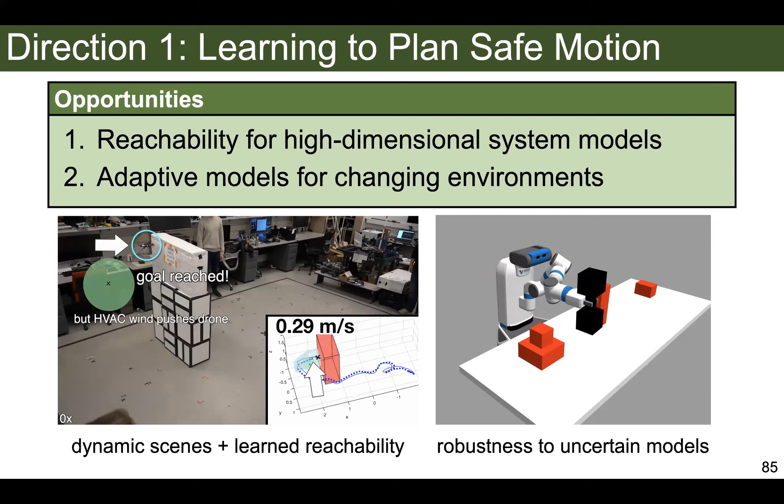So here we have a manipulator trying to move this weight from one side of the table to the other, but it doesn't actually know the mass of the dumbbell. It can still be robust to this type of uncertainty while making a guarantee that the dynamics, not just the kinematics of the arm, are safe.

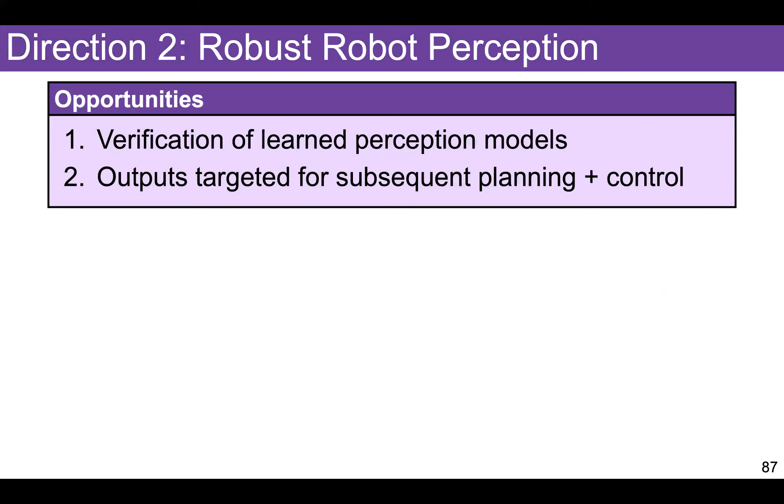Of course, none of this means anything if the robot can't tell what's around it. So I've started thinking about this idea of verifying learned perception models, and really verification on the perception side alone doesn't really make sense unless we think about it in the context of planning and control. So something that we started doing, and I would be excited to talk about this more offline, is learning to communicate safety information in smart cities.

This is also very closely tied in with the notions of society and law. So something that's happening in Atlanta is this notion of the Operation Shield. They've put thousands of additional cameras everywhere with the idea of doing predictive policing throughout the city. And it makes some people feel safe, but other people feel much less safe.

So if we're going to propose that cities are watching everything we do, I think we should approach this very, very cautiously. And in this case, we tried doing a self-supervised approach. So any bias that's present in the data will actually continue to be present in the deployment of such a system. And talking about these issues is, I think, critical.

A different way to think about perception is in the notion of how you represent your scene. This is not my work. This is work from some colleagues at Stanford who showed how to do MPC through a NeRF, so a neural radiance field. And I'm curious to start to see, how do you actually guarantee collision checking? And there was a really good SIGGRAPH Best Paper Award recently that showed how to make some guarantees about NeRF training and evaluation.

So this part of the community is, I think, very exciting to think about these problems and know that if we can target the outputs of our perception stack to be particularly useful for planning and control, then we can get some nice safety guarantees while actually avoiding conservativeness or decoupling safety and performance, as is our overall goal.

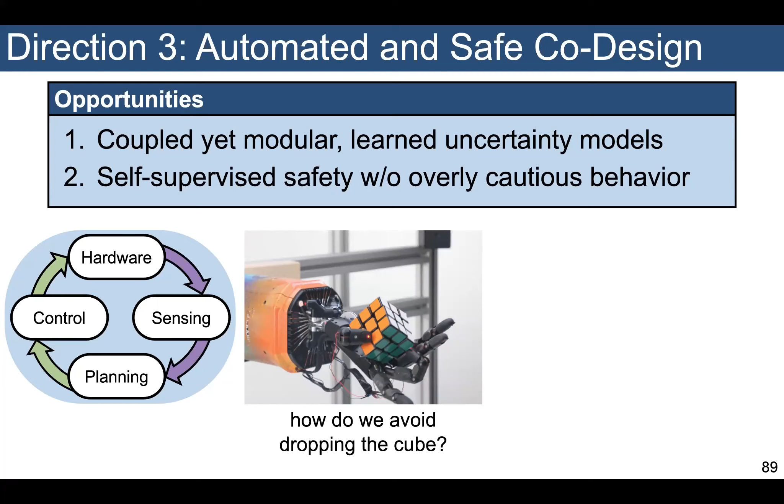So it would be very interesting then to model grasping these types of objects and making sure that we'll safely interact with it without ever dropping it, for example. We've also seen more extreme dynamics. So TRI has been working on this idea of safe drifting, and it was kind of cool to see these cars in person. This is awesome. I mean, it's really, really cool, right?

This is working at runtime, doing this super complex nonlinear control, but in this case, they know exactly what is around the robot, and they know where exactly the robot is. And as soon as you start to bring in uncertainty, I think it's much harder to plan and execute these dynamic motions, but by co-designing the parts of the autonomy stack, I'm very excited to potentially plan these extreme or agile maneuvers at runtime.

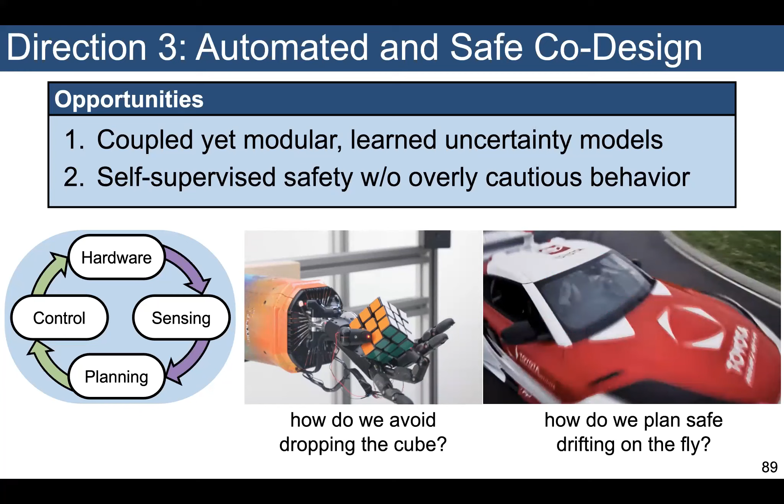So ideally, as I push this research forward and I work with smart people like yourselves attending this talk, instead of asking, are we there yet in terms of do robots work, we'll just ask that question directly to our autonomous cars. And with that very, very cheesy joke, thank you so much.